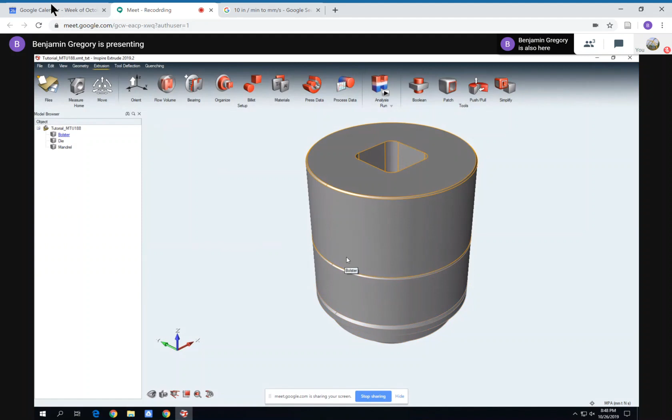Once the software is launched, we can open our CAD. I have a Parasolid file right here. Also, STEP files work well with the software. So we'll import that CAD. The best way to have your CAD is in an assembly. In this case, we would like a die, a bolster, and a mandrel all assembled together. You only need the die though.

We will start by orienting our assembly. We'd like the material to be coming out in the positive Z direction. In this case, the assembly is properly oriented. If it's not, you would click the Orient button, click the die exit surface, and it would orient it for you. Now we'd like to extract the flow volume.

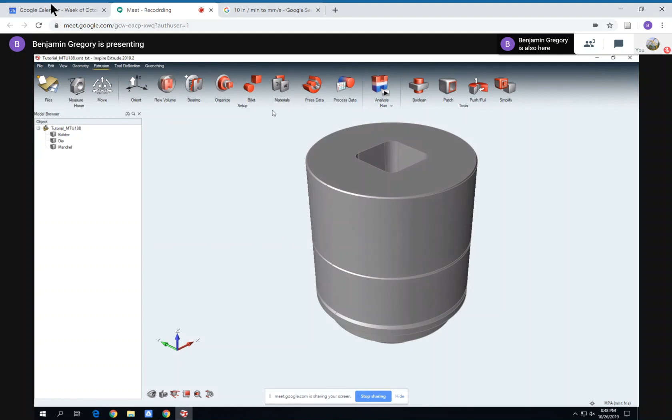We do this by selecting the whole assembly, hitting flow volume, and letting the software extract the flow volume. This is empty space between the mandrel and the die. We don't want it here, so we can hit delete.

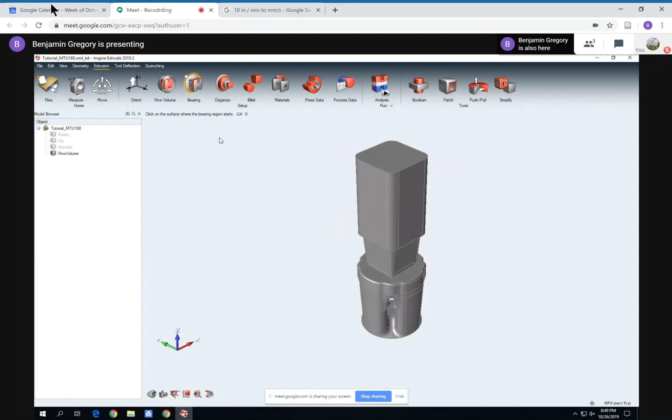If this menu is not up, click View and Model Browser, or F2. We now see bearing curve 1 and bearing curve 2. The bearing is also created and the profile. We will leave these all at their default. We would now like to create a pocket and the portholes, so we hit the Organize button.

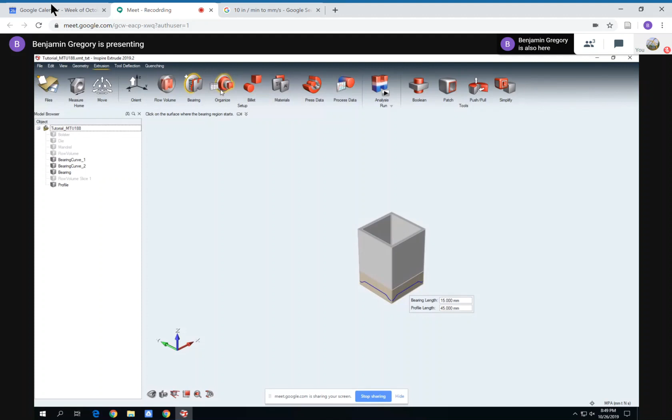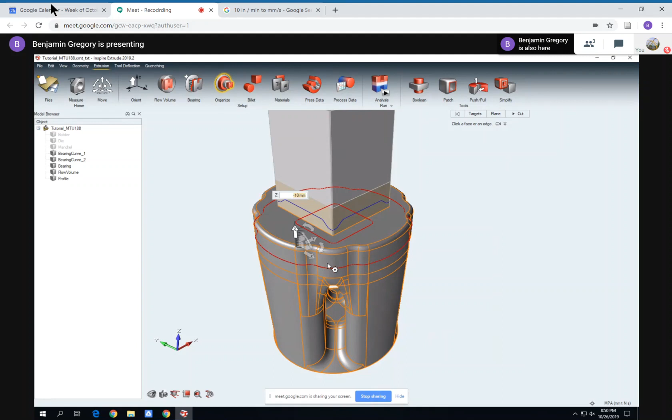And if we zoom out, we see that this whole thing is a flow volume right now. We'd like to split it into the pocket and portholes, so we click on the top surface, and we click this button. We click the Z and we drag it down. I like 10 millimeters because there's no complex CAD anywhere here. It's an easy surface to cut. You hit cut. Now we can exit out of this menu.

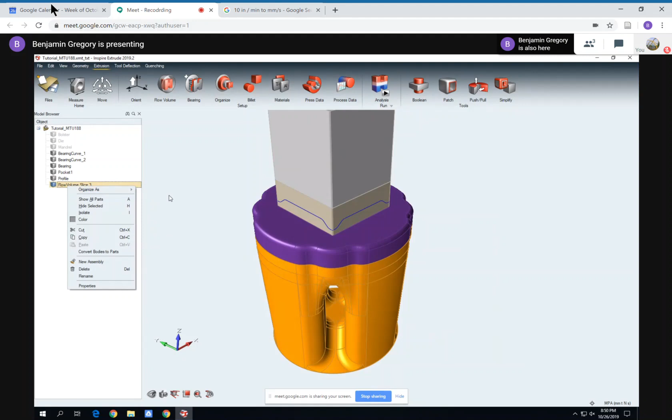So now we have two flow volumes. We can make this flow volume a pocket by right-clicking, hitting Organize As, Pocket 1. This flow volume we can right-click and hit Organize As, and we want those as portholes. So now our flow volume is properly set up. We can add a billet by hitting Billet.

Our billet diameter for Michigan Tech Press is 3.5 inches, or 88.9 millimeters. The container diameter for Michigan Tech Press is 3.7 inches, or 93.98 millimeters. And the maximum billet length in Michigan Tech Press is 10 inches, or 254 millimeters. We're going to go with no skin thickness, as that makes the computation much longer. If you'd like to, though, you could add in skin thickness at this point.

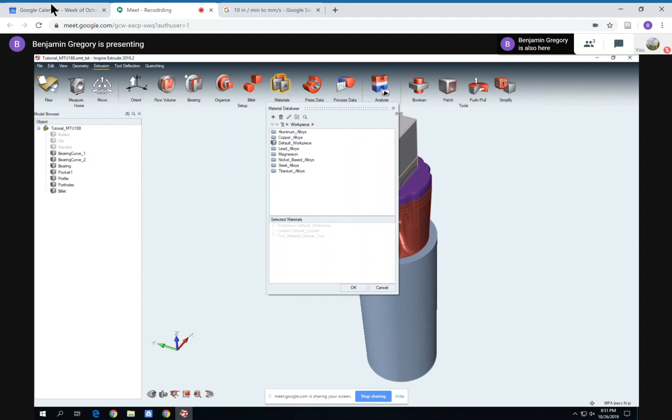Next we're going to, or not yet, select our materials. We're going to add boundary conditions on the bolster so that the software will take into account deformation of the bolster, die, and mandrel during its calculations. By doing this, we show all three pieces.

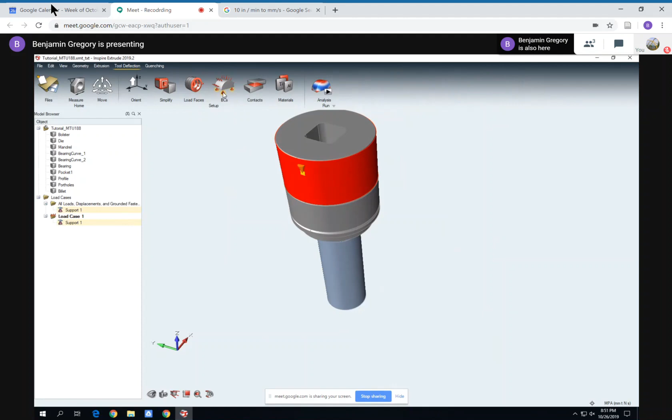Once all three pieces are visible, we click on Tool Deflection up here, and we click on BCs, these little feet below, and we click on the side of the bolster. That's applied the boundary condition to the side of the bolster. We click the feet again to exit out of the menu, and we right-click on the bolster, organize it as a bolster, organize the die as a die, and organize the mandrel as a mandrel.

Now we can go back to the extrusion menu, and we can look at our materials. So we have to select three materials: a workpiece, a coolant, and a tool material. For the workpiece material, let's do 6063 aluminum. So I right-click and I click Select, and now we see that that's been selected. I can click on this folder and now go to Tool Material.

All of the tool materials are H13 tool steel, so I will select that. I'll also go to Coolant, and we will select the default coolant. Click OK. Now our materials are selected.

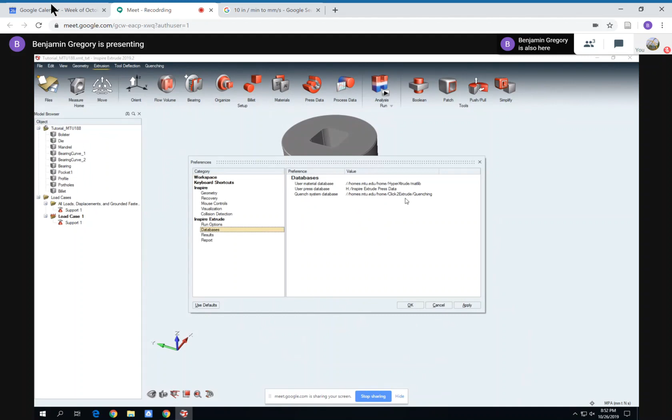Next is Press Data. If this is your first time using the software, you'll want to go to File, Preferences, Databases, and set your press database to somewhere other than the C drive. For me, I've set it to the H drive and in a folder called Inspire Extrude Press Data. Select the folder, click Apply, and click OK.

Now here's my user database in that folder. I've created a press by clicking this button, which lets you add a press. I'm using Michigan Tech Press. You would enter in all of this information. Michigan Tech Press has a 60-second dead cycle time as an approximation.

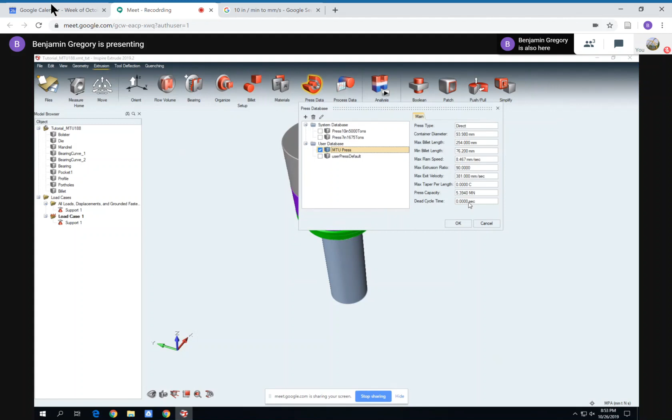However, we are running one transient analysis with no cycles. We don't want it to calculate 60 seconds before or after, which it would do if we had a 60-second dead cycle time. So to save time, we have 0 seconds entered as our dead cycle time. Click OK there. And now to the variable time step data.

This billet length is calculated automatically based off of the previously entered billet length. You do have to change the butt length. We do 15% of the full billet length. So 15% of 254 is 38.1 millimeters. The RAM speed we have as 10 inches per second, which would be 4.23 millimeters.

Sorry, 10 inches per minute, which would be 4.23 millimeters per second. We will keep the default RAM acceleration time. Now if you are going to do a transient analysis, you go to a manual time step, and you can change all of these factors.

For us, we care a lot about the maximum pressure, so between 0 and 5 seconds where that maximum pressure will likely be hit, I'm going to up the number of time steps to 10 steps at a step size of 0.5 seconds to give us a better chance at accurately catching the maximum pressure. We don't really care what goes on after that, so I'm going to lower these to 2 seconds to decrease the time it takes to run the analysis. Click Apply and OK.

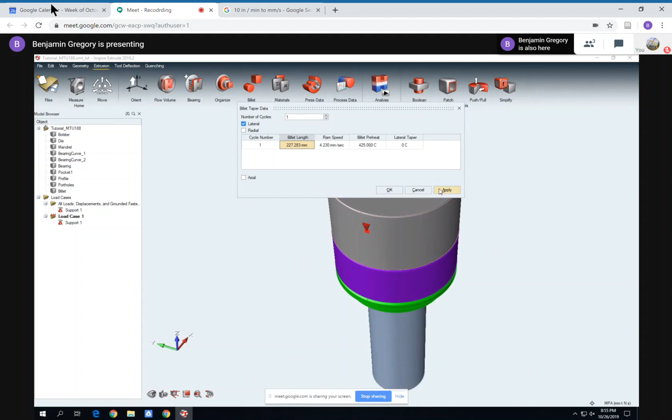Next up is the billet taper. We have no taper, so we are going to set this at 0°C. Our preheat temperature can be whatever we want, in this case 425°C. The RAM speed you have to re-enter again, and that will be 4.23 millimeters per second. And the billet length was again calculated automatically by the software. You hit Apply and OK.

Now we're ready to run the analysis. We click this button. The RAM speed is correct this time, but guess what? The billet preheat temperature did not update, so we will make that 425. So this brings up an important point that these two variables, RAM speed and billet preheat, have to be consistent across these three menus. So make sure that they are consistent because they don't always update.

Next, the die temperature. Michigan Tech usually does 425°C and 425°C for the container temperature as well. Mesh size controls how nice of an analysis you're going to do, but also how long it will take. So you'll get a better analysis, but it will take longer with a fine mesh. You'll get a less accurate analysis, but it will take a lot shorter with a coarse mesh.

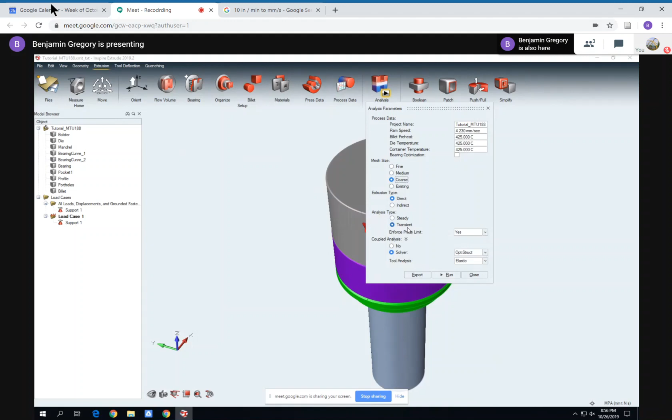We have a direct press. We'd like transient flow so that we can calculate different time steps. If it was steady state flow, it'll approximate the entire extrusion as one steady state process, which does not get the nice pressure spike at the start before breakthrough has occurred. So, in my opinion, steady state is pretty useless. You always want to use transient, but transient does take longer. All of these other defaults are good, and we click Run.

Now a menu opens showing the status of our run. This run will probably take 2 hours to analyze. Once the calculation is complete, you can go to the Run options, and this will show you the file path and where all of the information for the run is stored. If I open this, this is run 02, and right now we have nothing in the folder, but as the run happens, more and more files will be populated.

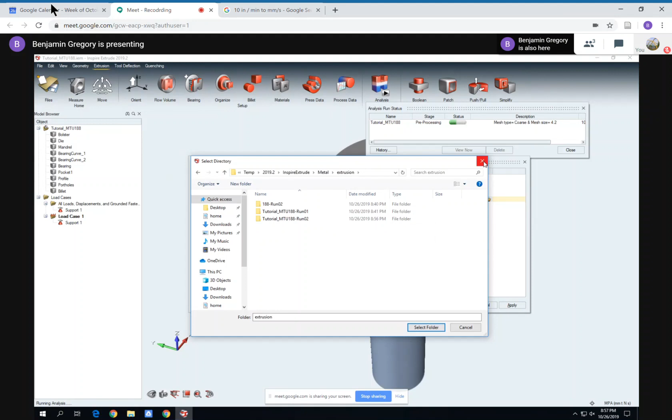Once the run is complete, you click on History, and it allows you to see temperature during each of the time steps, pressure at each of the time steps, and other things such as grain size, relative exit velocity, and so on. Also within this folder is a .stat file. That is just a text document that you can open up and get specific numbers for the maximum pressure and maximum temperature during each time step. So that can be incredibly useful.